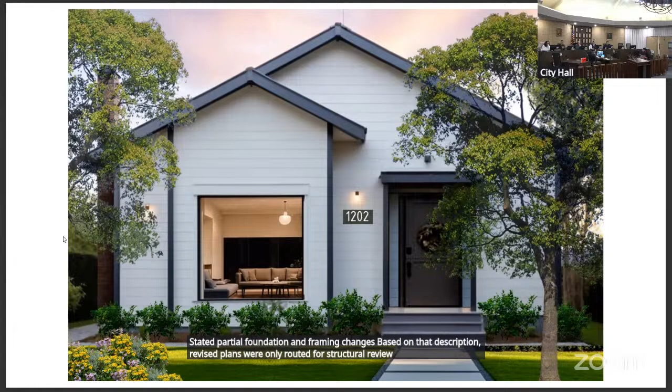Based on that description, revised plans were only routed for structural review, and the revision was approved. The revised plans were not routed to other city divisions for review.

However, the revised plans showed more extensive work than described in the revision statement, which included removal of all walls except for the front wall of the house.

Removal of more than 50% of exterior walls of a house is subject to design review. Therefore, revision number 4 was issued in error since it was not properly reviewed by all city divisions.

A stop work order was issued on January 22nd, 2025, and the applicant was notified to submit an application for design review. With this application, the applicant is proposing to rebuild the original one-story dwelling, including the rear first-floor addition within the same footprint.

The total proposed floor area would be 1,553 square feet, where 2,479 square feet is the maximum allowed. The total proposed lot coverage would be 1,568 square feet, where 1,724 square feet is the maximum allowed.

The applicant is also requesting a variance for the front setback to retain the existing front setback at 16 feet, where the block average is 19 feet 2 inches.

There would be a total of 3 bedrooms in the proposed dwelling. No parking is required for the ADU.

When an existing garage has been demolished in conjunction with construction of a new ADU, that covered parking does not have to be replaced. Therefore, there is no covered parking on site and no covered parking is required.

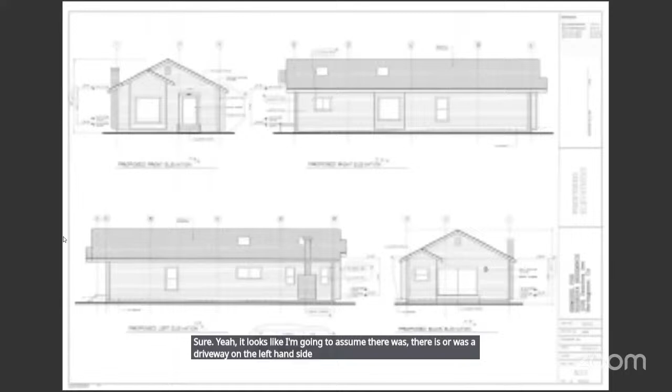Sure. About the driveway, it looks like there is or was a driveway on the left-hand side, or is it on the right-hand side? I just wanted to know if the one driveway that exists is still going to exist, and how wide is it?

It's a little less than 9 feet. It's 8 feet 10 inches.

Is that enough to actually fit a car in? Code requirement requires a minimum of 9 feet, so it is existing non-conforming. Okay, thank you very much.

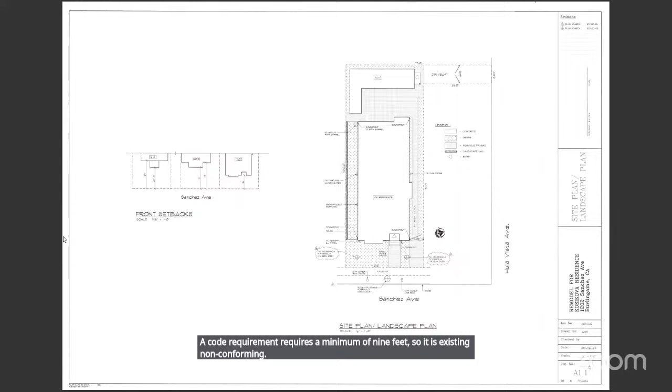Any other questions for staff? Okay, I'm going to open the public hearing. Would the applicant please come forward and state your name and anything else you'd like to add about your project?

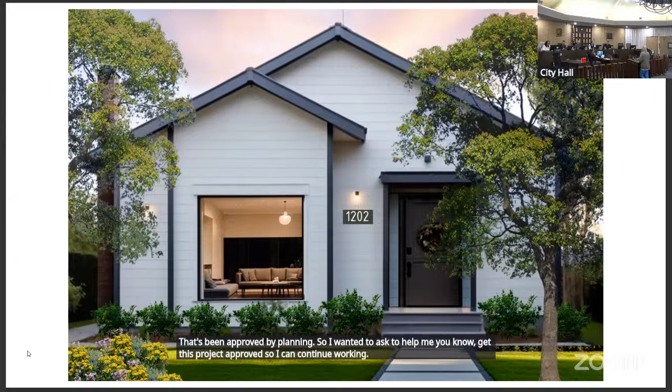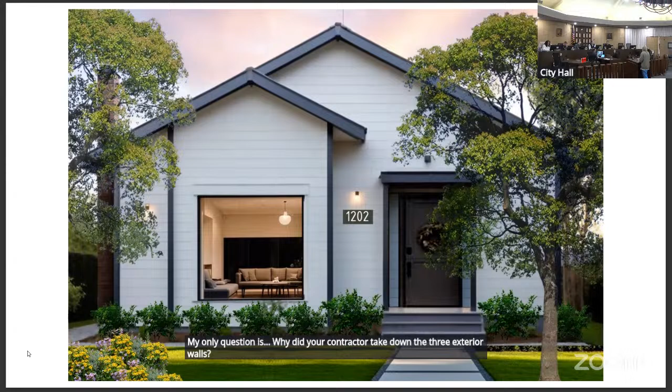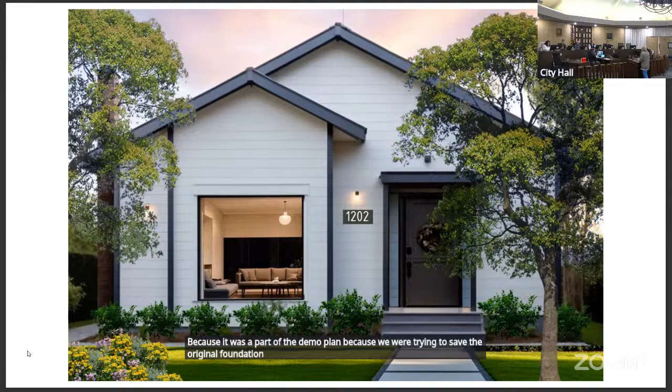Thank you. Do we have any questions for the applicant? My only question is, why did your contractor take down the 3 exterior walls? Because it was part of the demo plan, because we were trying to save the original foundation, and it wasn't working.

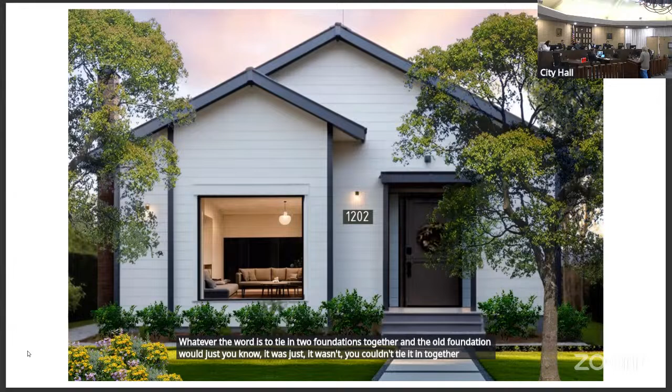It was made out of bricks and sand. Half of the house was built on a slab, there was no foundation. When we took out half of the house, we dug all the trenches for the new foundation, and we tried to tie in the two foundations together, but the old foundation just couldn't be tied in. So this was the only option. Thank you.

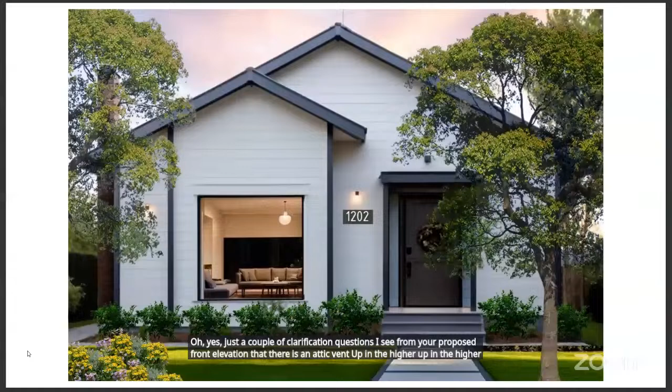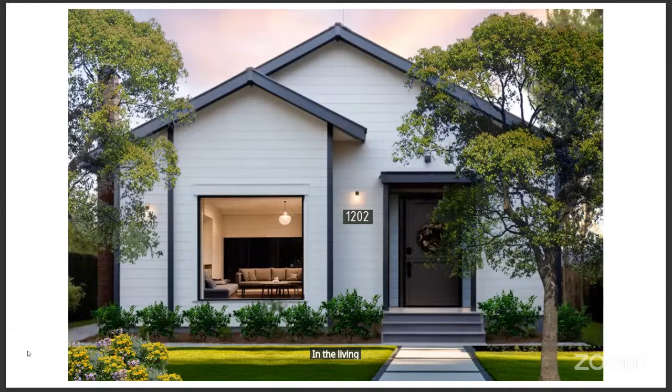Commissioner Say has her hand up. Go ahead. Just a couple of clarification questions. I see from your proposed front elevation that there is an attic vent up on the higher roof area. Is there an intention for that to be there? It's not on the rendering. And would there also be one in the living room bay window, I suppose is what it is?

We are doing exposed ceilings, and we'll have... what one? Yeah, hello? We have cathedral, exposed ceiling, and we will have a vent in the backyard because those will be closed ceilings. So I think that could be a mistake. So the proposed elevation should look like the elevations we're looking at now on the screen, as opposed to the rendering?

Yeah, I think it's a mistake, the opposite. Maybe, is it proposed? I can't see, does it say it's proposed or existing? Your proposed elevation shows the attic vent, which I think is also a mistake, reflected on the rear, and that's your intention.

Thank you. And then you had spoken about it too, but I see from your reflected ceiling plan that you have a volume ceiling in that living room. So you have the 9-foot plate height. Is the volume ceiling higher than that 9-foot plate height, or does it peak at that 9-foot plate height? No, we're keeping the existing height of the house.

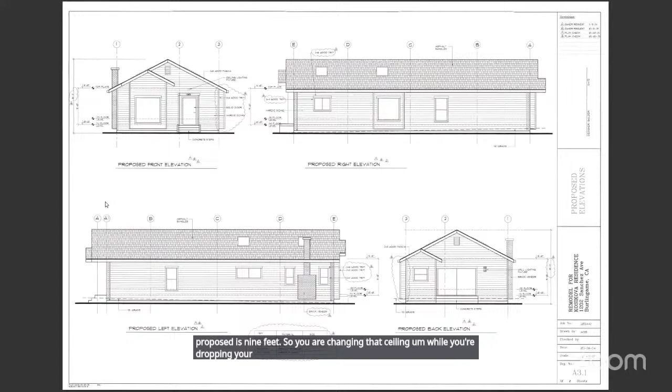Well, you're dropping your foundation down, which is how you're gaining that height. Yes. But can you answer the question: is the tallest point of the ceiling in the living room in line with your 9-foot plate height line, or higher than that? In other words, does it go into the attic space of that living room ceiling?

Sorry, hold on one second. You need to speak into the microphone, it's being recorded. Oh sorry, I can't hear. We have 9 foot. In the center where the vaulted ceiling is, we have 1 more foot, 10 foot. So the very center is 10 feet tall. And then lastly, is it correct that this living room window sill is just at floor level, sort of in line with the front door?

The sill of the window in the living room - does the bottom of the window line up with the bottom of the door on that front window? Yes, exactly the same. We haven't changed the size. We don't change the design in this house. It's the same size in the window and doors. That's enough, thank you.

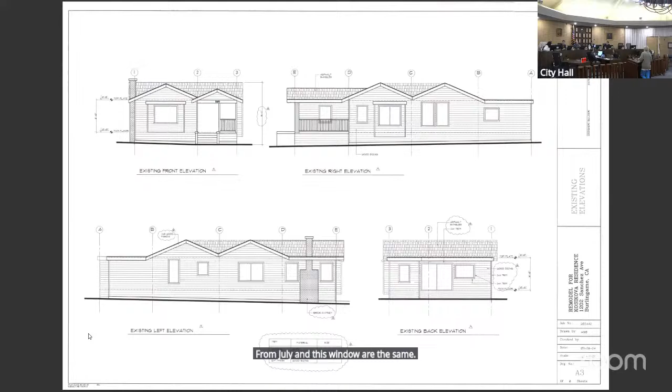I think your proposed elevations also reflect that. What the applicant is saying is there's no change from the original submission in July, not from the existing house. Is that correct? Yes. So it's not that the existing window and the new window are the same - it's the original application from July and this window that are the same. I agree, and I think Commissioner Say's question is whether it's actually going down to the floor. No, it's not, it stays where it was.

Okay, it stays at the 8-foot plate height. Anyway, those are my questions. I'll reserve comments for later.

Okay, do we have any other questions for the applicant? Yeah, I do. Jen? Yep, go ahead. Yeah, I had a very similar question about the window.

Your original window on the house was something like a bay window, probably an enclosed porch that was enclosed at some point. So that was a completely different window, and I don't understand how this relates to that at all. To me this is a complete do-over. So my question would be, if it is this low, is there a reason you picked to have a very large window put down quite so low? Because it looks out of proportion.

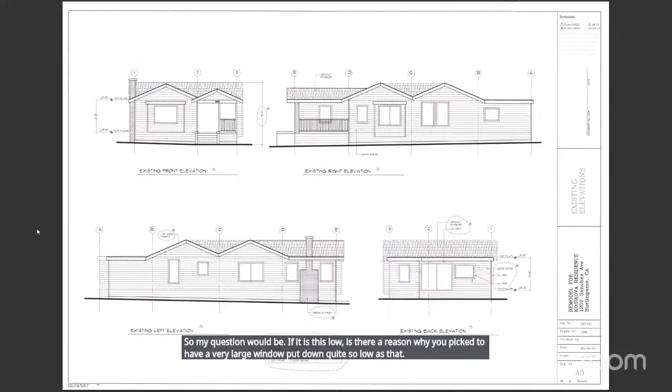I think it's the rendering - I have the front wall that still stands there, and we're going to keep the same exact way it looks. So I think the rendering looks more modern, but it will just update the siding. The front of the house will basically have the same view, the same exact window. I have it sitting in storage.

No, that's not really what I'm saying. I understand it's a picture window, but it's not what you had before. You're referring to the previous plan when you were reusing a lot of the foundation, so it was not considered complete and in need of design review. For us, this is the first time we're seeing it.

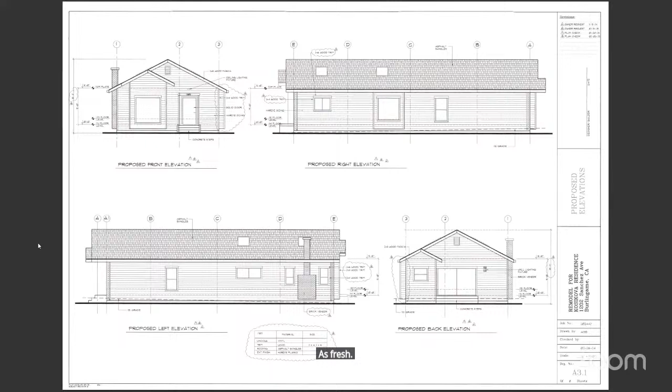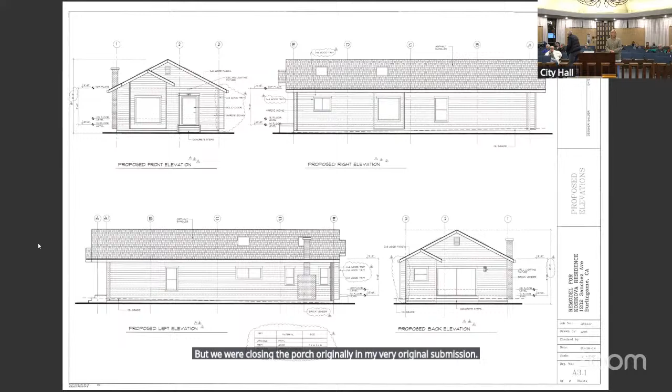I don't know if I understand how to answer this. To us, we're keeping that front wall the exact same way - we're not changing anything except closing the porch and making it a living area. The front view won't be changing. But we were closing the porch originally in my very original submission. Okay.

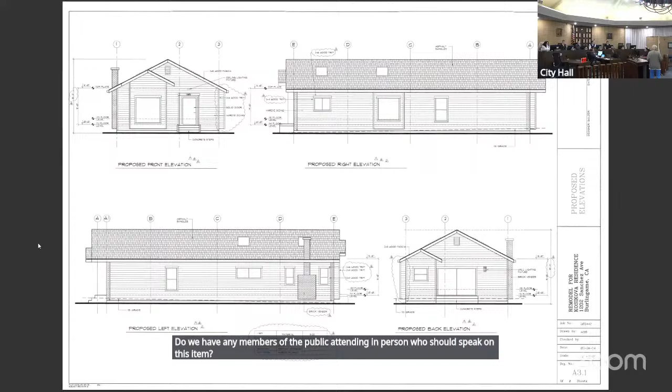Any other clarifying questions? Okay, no other questions. Do we have any members of the public attending in person who wish to speak on this item? Please note that speakers are limited to 3 minutes each. Yeah, go ahead.

Just on that issue, if she has changed the height or anything, they probably need a structural engineer to check the seismic part of it and wind, whatever forces need changing in the height, because it may be a weak link of the structure, just for safety, and then the city can buy off on it. That's all I'm saying. Thank you.

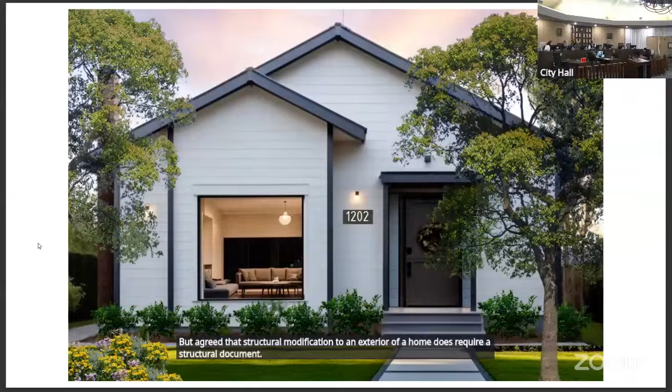Structural modifications to any building are not in our purview, but we rely on the building department to review structural applications, and we have a lot of faith that they get those right. Agreed that structural modifications to the exterior of a home require a structural document, and that also goes for civil drainage. If you're an adjacent neighbor concerned about drainage, I highly recommend consulting a civil engineer, potentially in unison with the builder. The Public Works Department also thoroughly goes over drainage plans, and I have a lot of faith in them.

In regards to this project, I like it. I think it's a nice looking home. I think it's a shame that it came in this way. I do share a few of the confusions with my fellow commissioners about the front window, because it's different than the original. It's bigger and it's definitely dropped down, so there might be some clarity needed there.

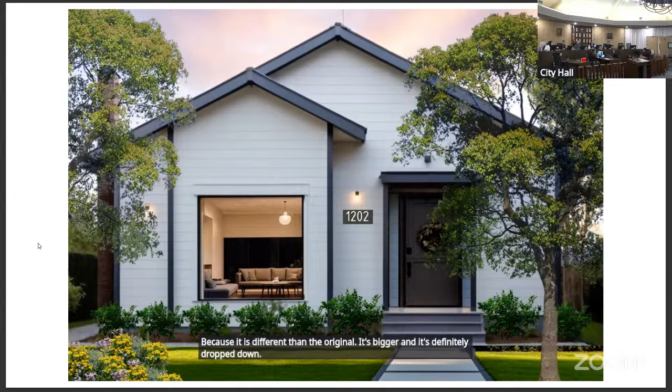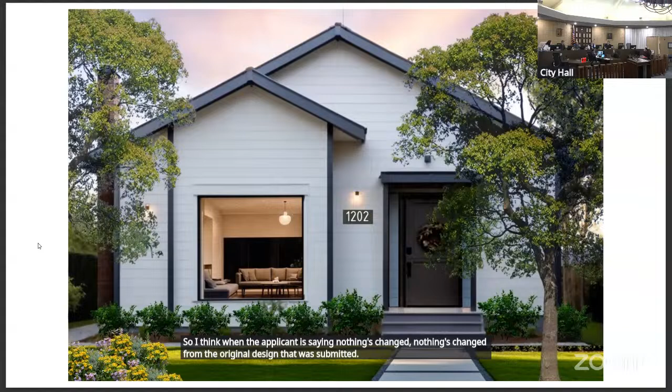My assumption, based on the conversation, is that this is the design the building department approved before we knew the demolition would take more than 50% of the exterior walls down. So when the applicant says nothing's changed from the original design submitted, clearly it's not the same house that existed—the roof line is different, the windows are different. I think this is unfortunate. I don't think the building department nor the sponsor meant for this to happen. I think it just evolved as the foundation situation became clear.

But given where we're at now, I think the house is fine. It's nice that it's staying the same size—it could be much larger. It's on the same footprint, and I think they're going to improve the site plan, permeability, and trees. So given the history of this, I would be inclined to approve.

I tend to agree. It's a big window, but given the style, I don't know that it's wrong for it, so I'm okay. The lot coverage isn't excessive, so the fact that what was originally a pop-out bay is turning into square footage going to the ground isn't a big deal. I think it provides articulation to a front elevation that would otherwise be flat, so it actually works pretty well.

I think it's important—this is a pretty streamlined design. As I look at how this gets finished, even the little beams at the top that pop out in front of the fascia add articulation. That's important to me. It seems small, but it matters in creating a look for this elevation. If you just cover it up, it'll look like they went cheap and didn't do anything nice. So that, and the header over that big window, are important—it's important that it shows, otherwise it'll just turn flat on the elevation.

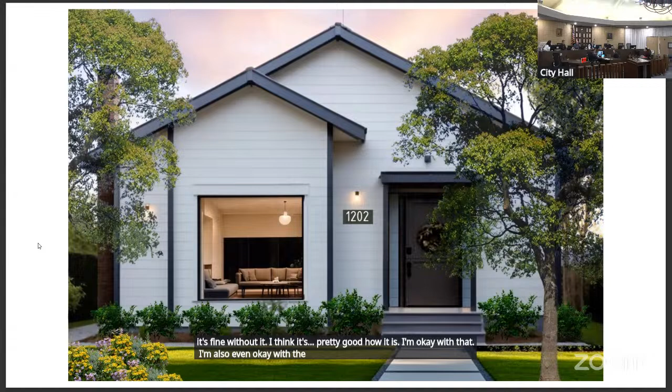I think it does a very good job of treading the line between more traditional elements and more contemporary elements, which a lot of projects try to do with varying success. I was originally going to suggest adding fake attic vents back, but the more I look at the rendering, I think it's fine without it—pretty good how it is. I'm also okay with the much larger window; I think it'll be fine behind the bushes. I don't have anything to add to the project—I'd be okay with it. I also wanted to echo the comment about the roof: with the unified roof line, it's probably going to cast less shadow now, all things considered.

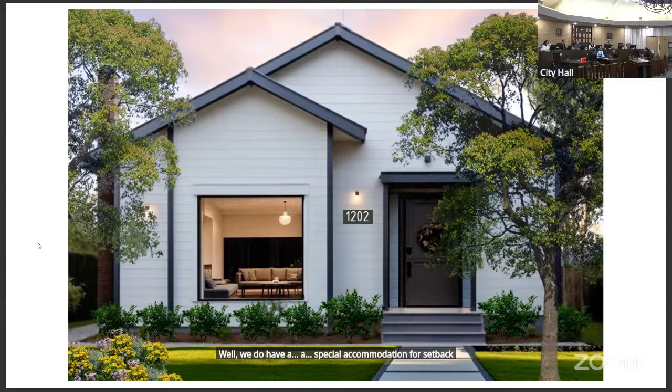Well, we do have a special accommodation for setback. Anyone have any issue with that? Since it's an existing setback and an existing footprint now.

So do we have any motions? Through the chair, Commissioners Tse and Pfaff have their hands up. All right, let's do Commissioner Tse first.

Thank you. I generally agree with my fellow commissioners. I have no issue with using that larger window ordered for the living room, but with a 10-foot peak volume ceiling, it may look better and relate better to the interior if that window is raised up a bit, maybe in line with the top of the entry door, at about an 8-foot plate height.

Also, for the next go-round, just to clarify, I think I heard that the attic vents are going to be in the front and rear elevations for the tallest ridged roof. Sorry for the binging. I'd like clarification on whether that is indeed to be there or not.

I do agree that's a nice, clean style and a nice approach to reusing an existing footprint and updating the look of the house, so I'm not trying to put too much burden on them with the larger living room window.

I just think it would look better and relate better to both the exterior and interior if it was raised up a little higher. I can also support the front setback variance request.

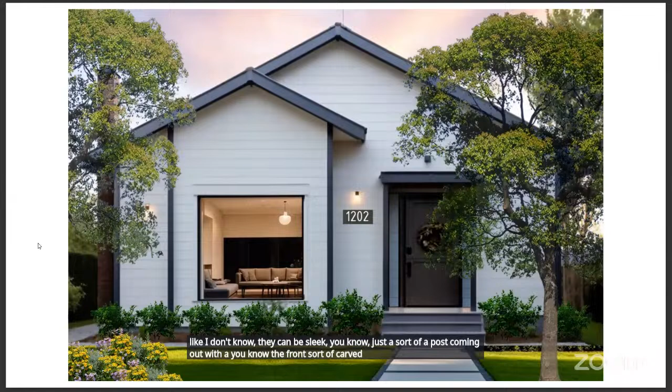With the front carved, like the neighboring house across the street, or maybe one block up, that has some of those. That might look really nice and kind of finish it off.

And the most relevant comment I have is I'm concerned about parking, because it's very tough on that block and there's really nowhere to park.

And I am concerned — I love the idea of having these two trees there, and I was happy to see that change.

But I actually don't think both trees will fit. I think they're going to get hit or something, because it's not going to take long for people to start parking on the front yard. It's just going to happen because there's nowhere else to park.

So I was going to suggest that maybe you speak with our Public Works parks liaison, Ellen. Perhaps there's a way you could move one — I think it's a jacaranda, but I forget now.

My head is so stuffy. Maybe you'd be able to move the one jacaranda to the back.

That might beautify the lot and the area for the neighbors who are going to have the ADU much closer to them now, and it might soften it. So I ask you to consider that, and if you do, of course the appropriate irrigation so that tree has a chance to survive and beautify the property. Those are my comments.

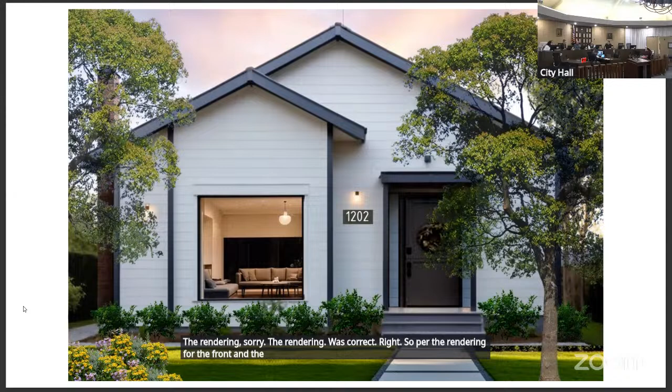Okay, sounded good, and then we can discuss it. Just to clarify, as drawn, because the rendering and the elevations are different. So I think the applicant said the elevation of the front is incorrect. The rendering was correct. So per the rendering, for the front, and the elevation for the back, without vents. I second that motion, sorry, I wanted to jump in.

She did mention the attic vents though are intended to be in the front and back elevation. So that's not clear to me. I don't think so, Commissioner Say. I think she said it was a mistake and that the rear was correct, but the rendering is correct, not the elevation for the front. Oh, okay, so maybe I misheard that.

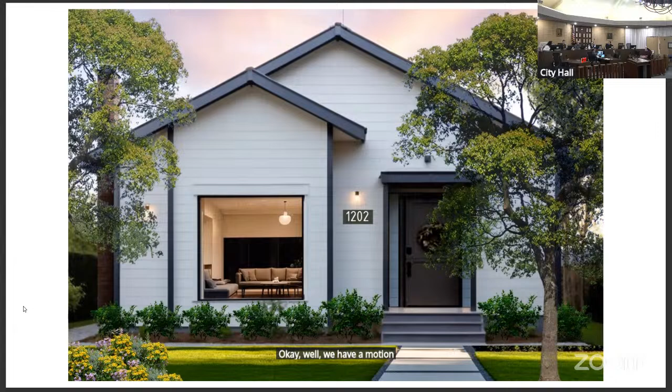Okay, well, we have a motion by Commissioner Schmidt, seconded by Commissioner Haran. Do we have additional discussion on that motion? Then I will ask for a roll call vote.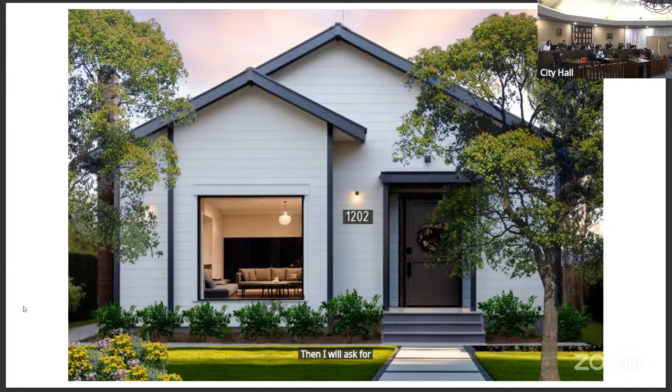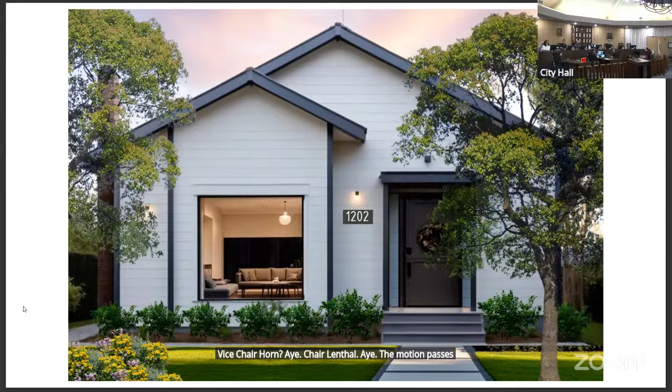Commissioner Comaroto, aye. Commissioner Pfaff, no. Commissioner Schmid, aye. Commissioner Shores, aye. Commissioner Tse, aye. Vice Chair Horan, aye. Chair Lowenthal, aye. The motion passes 6-1-0-0. Congratulations.

An action by the Planning Commission is appealable to the City Council within 10 days of the Planning Commission's action. If the action has not been appealed or called up for review by the City Council by 5 p.m. on the 10th day, the action becomes final. In order to be effective, appeals must be in writing and accompanied by a fee of $900, which includes noticing costs. Thank you very much.

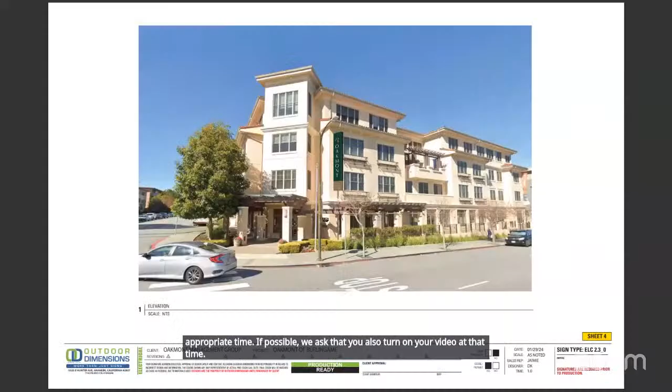Okay, moving on to agenda item 7B, 1818 Truesdale Drive. If you are the applicant and are attending the meeting via Zoom, please raise your hand so we may be prepared for you to speak at the appropriate time. If possible, we ask that you also turn on your video at that time. Were any commissioners not able to visit this project site, or do any commissioners wish to note any ex parte communication regarding this project? Let the record note that all commissioners present have visited the project site.

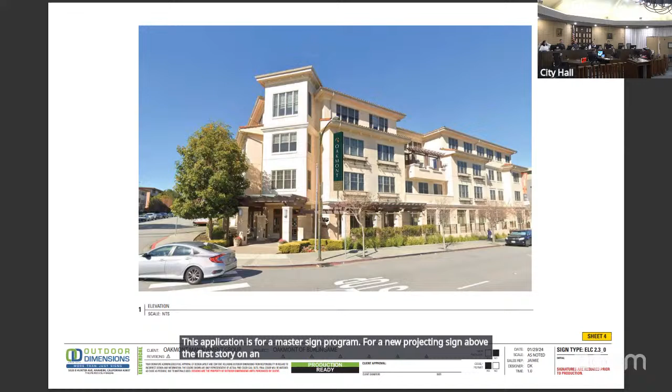Can we have a staff report, please? This application is for a master sign program for a new projecting sign above the first story on an assisted living facility building. The application includes a new projecting sign that is 50 square feet per side on the Truesdale Drive frontage, located on the second and third stories of an existing 4-story assisted living facility building. The proposed projecting sign would consist of a double-faced painted aluminum cabinet and be internally illuminated. In addition, two existing wall signs at the ground floor building entrance would be replaced with a new non-illuminated wall sign that is 8 square feet in size. If there are any questions of staff, I'm available at this time.

Do we have any questions for staff? No? Okay. I'm going to open the public hearing. Would the applicant please come forward and state your name and anything else you'd like to add about your project?

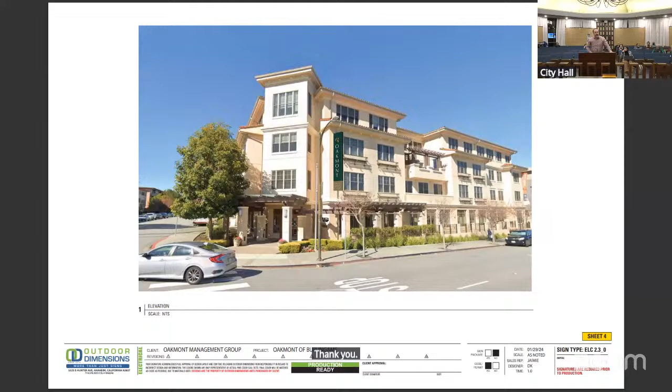Thank you. My name's Andrew Moret. I'm here on behalf of Oakmont Management Group, the management company overseeing the community. Thank you for your time, commissioners and chairmen. We are looking to add this sign to the side of the community on the Truesdale side of our assisted living community. Currently, it's a luxury senior living facility that houses about, when full, 100 residents and employs a little over 75 team members of the local community.

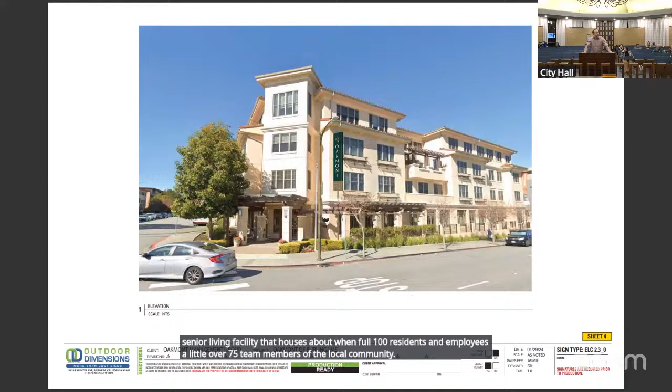We recently took management of the community in 2024, and during that transition, the previous operator didn't have any signage. So it's led to a lot of confusion at the community as to what it is. As you can see, it kind of looks like an apartment complex, which has led to some confusion of people coming in, looking to rent an apartment. So we feel like the signage would help clarify some of that.

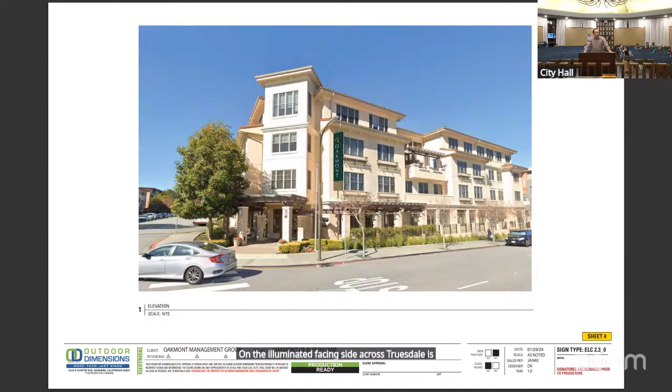Also, we put some time in on the design to make sure that it wasn't a sore thumb out on the street. It will be illuminated, but won't have a direct line of sight to anything residential or the apartment complex across the street. On the illuminated facing side across Truesdale is, I believe, a post-acute health facility, so nothing residential on that side. Do you have any questions for me?

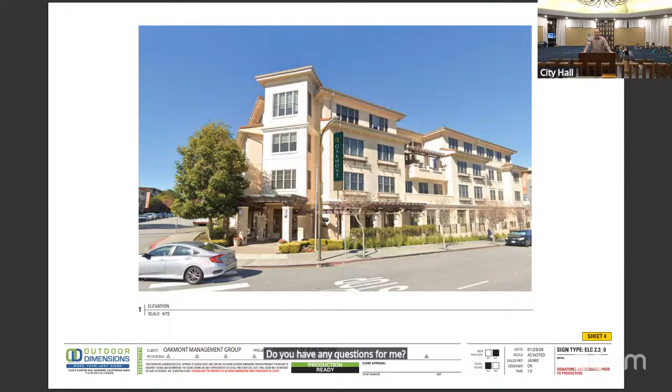Let me ask, do we have any questions for the applicant? I have a question. Do you have any pictures of how it's illuminated?

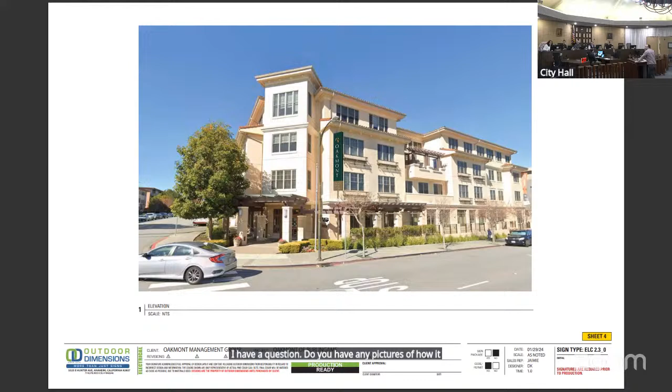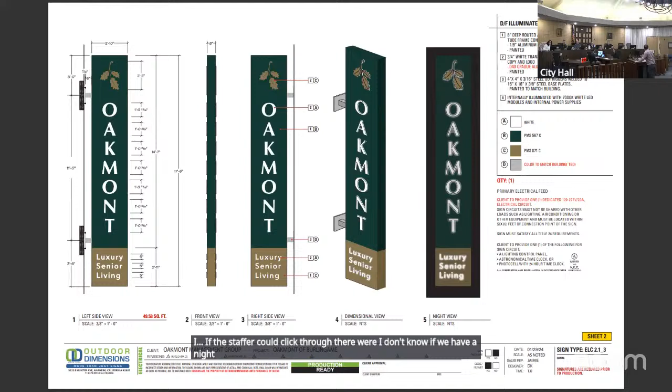If the staffer could click through - I don't know if we have a night rendering. That's the dimensions, from a couple of different angles. I didn't see a night render. Number 5 is night - far right is supposed to be the night view. It's hard to articulate night on paper.

Is there a way to bring us or send an image? We haven't installed the signs yet. That's a loaded question and a hot debate topic right now. We could throw it in ChatGPT, I guess.

It's LED lit, so it's soft illumination. It should illuminate itself but won't be bright - not the bright white you might expect. Can I ask - the reality is just the Oakmont Luxury Senior Living letters will be pushed through with light coming through, and the rest will be dark, correct? Yes, it'll be aluminum. The green won't have any illumination. That's correct - during nighttime you'll get minimal light. Got it.

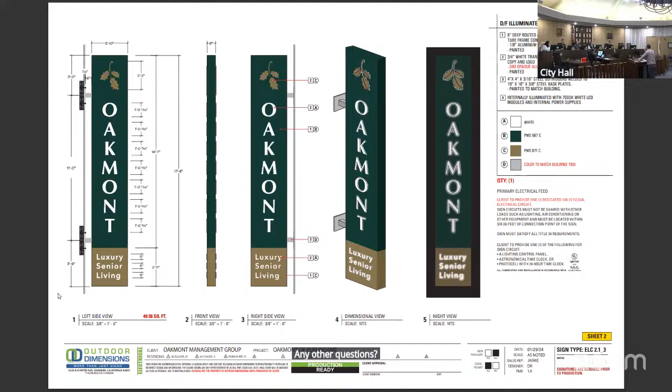Any other questions? All right, thank you very much.

Do we have any members of the public attending in person who wish to speak on this item? No? Okay, I'm going to close the public hearing.

Commissioners, any comments? I think this looks like a fine project going forward. Agreed. So do we have any motion?

I'll make a motion that we approve this per the drawings, the conditions, and the findings. Sometime this year I'll figure this out.

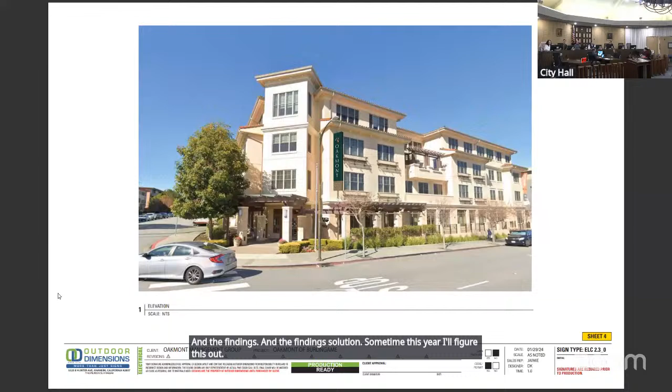I'll second that. All right, we have a motion by Commissioner Schmid, seconded by Commissioner Comaroto. Any other discussion on the motion?

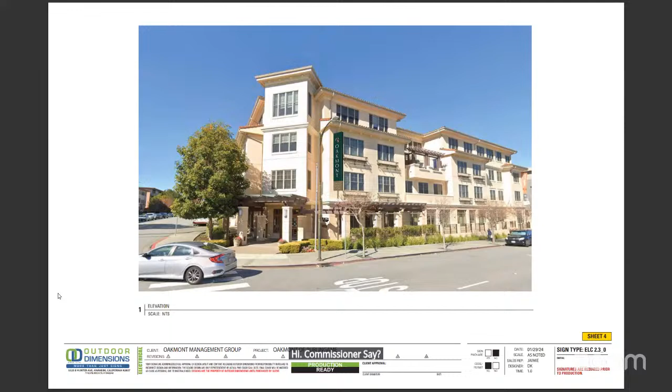May we please have a roll call vote, please? Commissioner Comaroto, aye. Commissioner Pfaff, aye. Commissioner Schmid, aye. Commissioner Shores, aye. Commissioner Tse, aye. Vice Chair Horan, aye. Chair Lowenthal, aye. Vote passes 7-0-0-0.

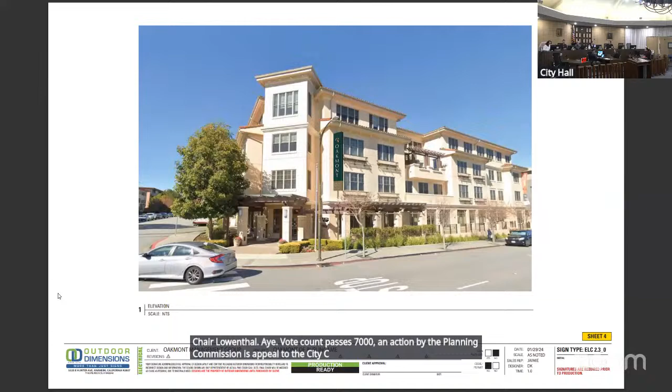An action by the Planning Commission is appealable to the City Council within 10 days of the Planning Commission's action. If the action has not been appealed or called up for review by the City Council by 5 p.m. on the 10th day, the action becomes final. In order to be effective, appeals must be in writing and accompanied by an appeal fee of $900, which includes noticing costs. Thank you. Congratulations.

Okay, moving along to agenda item number 8, study session: Broadway specific plan update and emerging vision framework discussion.

Good evening, commissioners. Neda Zayer, Community Development Director. I am joined this evening with MIG Consulting Group, which is helping the city prepare the Broadway specific plan. Dan here will be giving the majority of the presentation. I wanted to give a little background and context to what we're doing, and then Dan will do a deep dive into some history, some engagement we've done that has led us to this point, and the emerging vision framework, which will be the bulk of the discussion tonight and what we're looking for feedback on from the Planning Commission.

We're at the stage of our process where we've gone to City Council to float the draft vision framework to them, and now to you all tonight. Then we'll go out to the community at large through a workshop, pop-up event, and a couple other engagement opportunities to gauge the broader community's feedback.

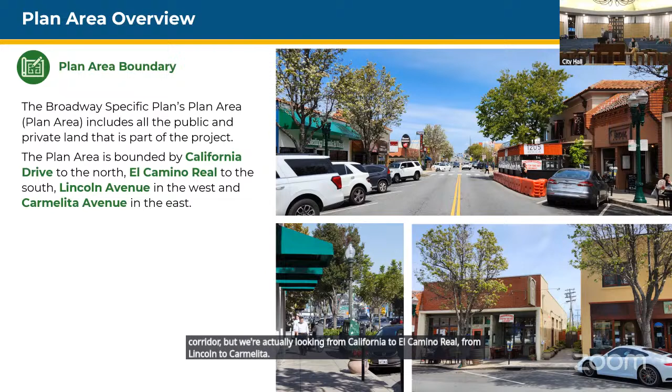Appreciate the time in front of the commission this evening. We're about halfway through this process to update the specific plan for Broadway. Our overall boundary focuses on the Broadway corridor, but we're actually looking from California to El Camino Real, from Lincoln to Carmelita - taking into account the entire neighborhood. As you can see in this map, we're not looking for a lot of overall zoning changes within the area, but as part of this project we are looking at circulation, connections, and how parking will work with various changes or concepts.

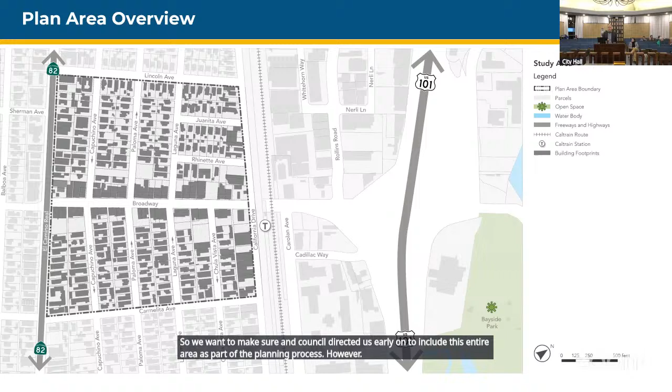We've heard from the advisory committee and also the community that parking not only along Broadway but also in the surrounding community is a high concern - both the management of parking and the volume. Council directed us early on to include this entire area as part of the planning process. However, the core focus is really on the Broadway corridor and the Broadway station.

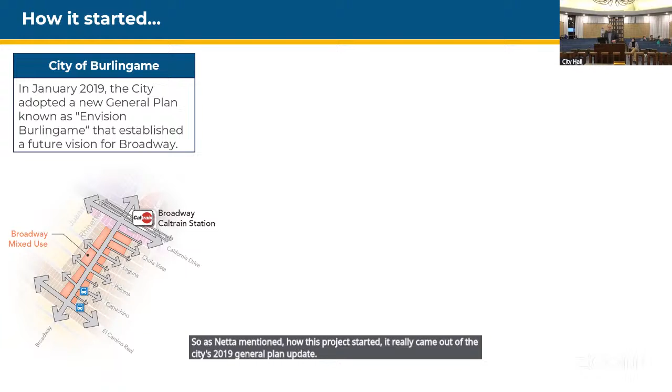As Netta mentioned, this project started from the city's 2019 general plan update, which looked at forming a future vision for the Broadway corridor. The general plan established Broadway mixed use, giving some initial land use direction on the opportunity to create second or third story residential along the corridor, and some incremental changes. In addition, the local business community also had a desire for a specific plan or more focused planning look at this area from a streetscape perspective, but also circulation, mobility, parking, and land uses.

As Netta mentioned, the Metropolitan Transportation Commission has a policy around high capacity transit areas to look at increased density for housing in particular, and additional bus or active transportation components that could be supported by that. All of these are working together, but ultimately this is the city's and community's plan. Some of the city's goals for this project break into three big categories, including updating policies or zoning for some of these tactical changes within the area - and you'll probably hear me say tactical a lot.

This is a very constrained area, as we know. The Broadway corridor is very narrow. There's not a lot of vacant land aside from city surface parking lots. So it is a very tactical sort of project, looking at some of this incremental change.

From a policy perspective, we're looking at the opportunity for more affordable housing, or more types or different unit sizes of housing that could work in this area, but really trying to support economic development, support the local business community, and align with general plan policies as we're creating this more focused look.

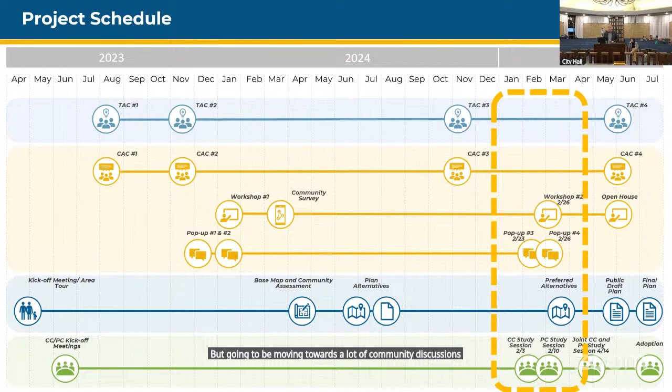So here's our overall schedule. We are in sort of the yellow dashed area. We're actually kind of in the midpoint of the process, but going to be moving towards a lot of community discussions around some of these concepts and ideas, and eventually coming back to commission and council with some direction on major components of the plan.

As part of this planning process, MIG, in addition with our partners at Bay Area Economics and TJKM Traffic Engineers, really did a pretty deep dive initial assessment on economics and some of the economic conditions that are in play today, an inventory of physical assets—building form, character, functionality of current spaces—and a lot of analysis on the mobility components and transit. So trying to get a lot of baseline information.

We have a community advisory committee that has been very active throughout this process. We met with them three times to talk about issues, opportunities, and also to go through existing conditions and context information. We've also held a series of pop-up events along the corridor, as well as a community workshop and an online survey, to get some initial community feedback on these ideas or concepts and whether they're worth considering or studying further.

This is a list of all of our project meetings. You can see there's been quite a few so far. We have many more, or several more, anticipated, including a workshop coming up later this month. So we're trying to get a lot of community discussion and input around some of these emerging ideas for the Broadway area.

We also have a technical advisory committee. So this is senior city staff in public works, parks, and other departments that have been looking at details and concepts as they started to arise.

So I want to talk a little bit about the Emerging Broadway Vision Framework and really why we have this. It's an initial high-level overview of the specific plan itself. The framework gives us high-level components of the draft plan, but starts to get into some initial ideas, strategies, and things to analyze further based on community feedback, best practices, the results of the existing conditions analysis, and some of the technical work as well.

So there's initially 5 vision elements, and then goals, strategies, and actions that build off of that. This approach is because it's a little bit of a land use plan, but also a strategic plan.

The Business Improvement District has been very much involved in this process. There's a lot of things around activations, events, and activities, and ways the city can partner with the BID to try and create more energy there. So it's a little bit different than a traditional land use plan that's just a zoning map and a mobility map. We're trying to also get a lot of partnerships and activities as part of this as well.

So I'll go into these in a little more detail, but our 5 vision elements are: welcoming, so we want to make sure this is an inviting place for residents, business owners, workers, and visitors; supportive, so it's a destination for a mix of housing, near jobs, near transit; and thriving, so it's a place to grow locally serving and dynamic businesses. That's a vision element specifically for supporting the business community.

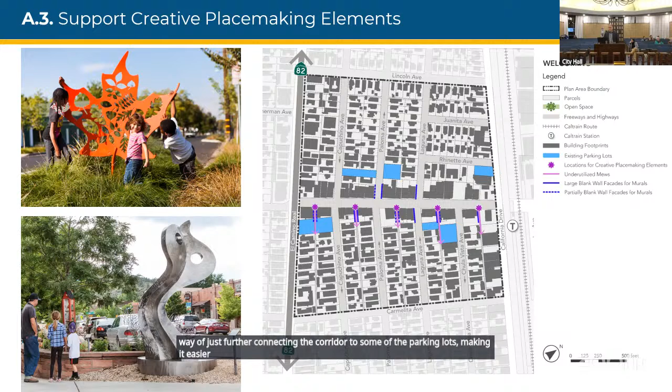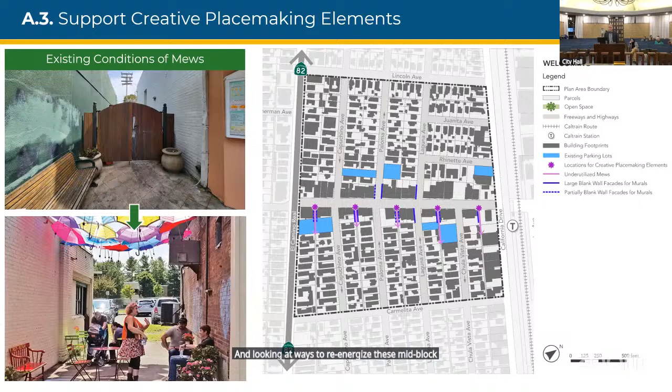Most don't, though -- they're actually old utility corridors. But we're looking at ways of further connecting the corridor to some of the parking lots, making it easier and more obvious for movements and activities, and looking at ways to re-energize these mid-block utility corridors so they can become mews with access to parking. So again, looking at some of those strategic interventions or strategies.

So supportive really gets into housing, leveraging the transit-oriented opportunity given the station. We do know there are some questions about the future of the station. We're using this process to try and advocate for more stops at the station. That's something the business community and local community has really, really said they want.

But looking at some specific strategies for how we address this, given this is a pretty focused area. So B1 is a key strategy.

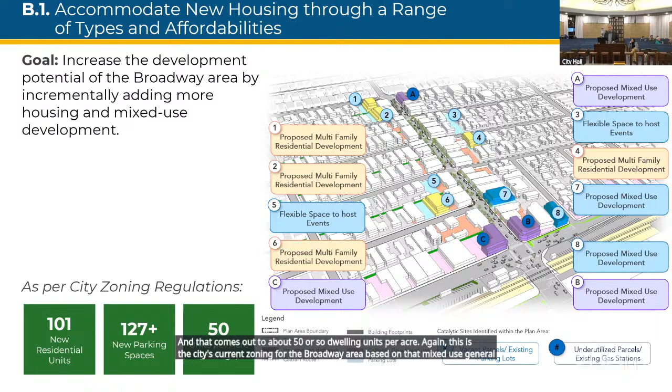As Netta mentioned earlier, we also have the MTC policy. We looked at their policy, which largely is around bumping up density to 75 units per acre, but also reducing parking requirements as well. That's a key MTC policy because it's a transit-oriented area, envisioned to be walkable to transit. So we started to analyze what that would look like under MTC's policy, which again is an option for the city, but we wanted to understand that from a physical design standpoint. That gets around 173 new residential units.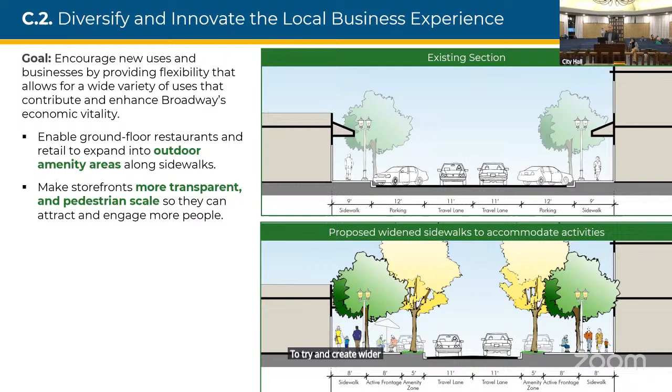D, again, is getting to connected. One thing we heard quite a bit from the pop-up events, but also from the community workshop, and from Public Works as well, is that adding bike lanes directly to Broadway is a huge challenge. One, it's just a very constrained corridor, but also it poses some safety issues given the amount of activities happening. So we're looking more at bike lanes on side streets, with connections to Broadway on local streets.

D1 is a key strategy: create a safer, more comfortable circulation pedestrian network with more sustainable landscapes, trees, and designs as well. Again, building on that idea of wider, more flexible sidewalks, providing additional opportunities for trees, for landscaping, for shade, and for some of these outdoor activities as well.

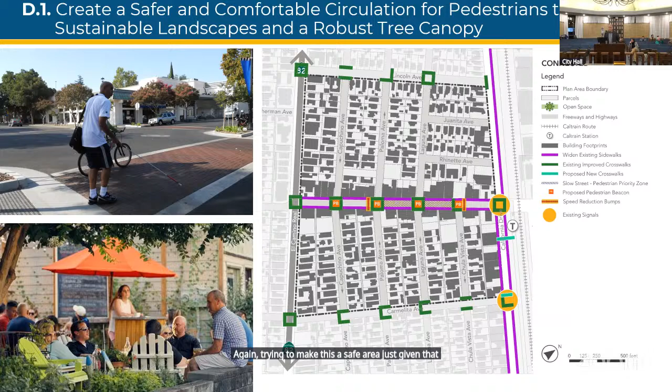But also key to this is several focus or tactical improvements along Broadway itself. As you can see in this diagram, we're identifying intersections for improved crosswalks, maybe improved bulb outs as well, potentially pedestrian beacons, which is something we talked about with City Public Works. Again, trying to make this a safe area, just given that Broadway is a key connection between two state facilities, 101 and El Camino Real.

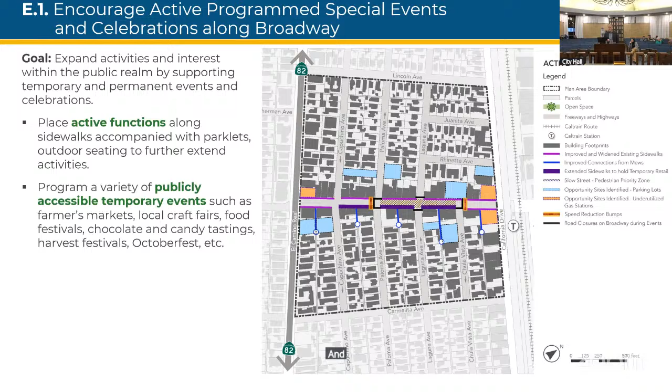And the last section is active. This is looking at those events, activities, ways the city can partner with the BID and business owners - encouraging outdoor programs and special events. We started to look at areas where this could happen, the potential of maybe one or two blocks that become more of a flush curb, and during certain events or weekends, it can become an outdoor gathering spot.

This street section, the bottom one, shows the potential for that. It would be an area where parking would be removed, maybe just in one area, but it's something we're testing along with the traffic firm to make sure we understand if it could work from an operational standpoint.

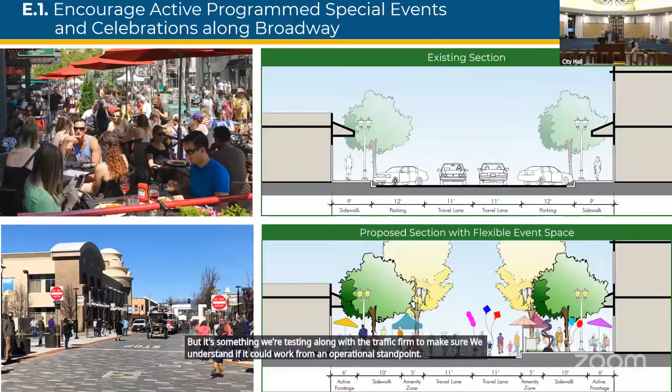So that's a high-level overview. There are a lot of components in this emerging framework, but for next steps, we have some upcoming meetings later this month and early March. We're going to have a pop-up event at the Farmers Market on February 23rd, and then another big community workshop on the 26th of this month to get a lot of feedback on all of these concepts and strategies - what people like, what maybe they're concerned about - and then take that feedback and some refined strategies back to Planning Commission and Council, moving towards some preferred alternatives later in spring of this year and a draft plan in summer of this year.

So that's a high-level overview, but I'll pause for any questions from the Commission.

Thank you very much, I have one off the top question. Does any of this framework take into assumption the grade separation at the Caltrain tracks, or is it completely independent of that project? It is taking into consideration the grade separation. There's been a few different designs during our process for the grade separation, so we're looking at the potential for additional pedestrian connections to that project. There are questions about whether the station will be a part of it or not. We're trying to be flexible because that's outside the full purview of the city, but this project is hoping the grade separation and station remain an active piece of the rest of this process. So we're assuming it's going to happen, but if it doesn't, there could definitely be options within the plan to look at intersection improvements in that scenario.